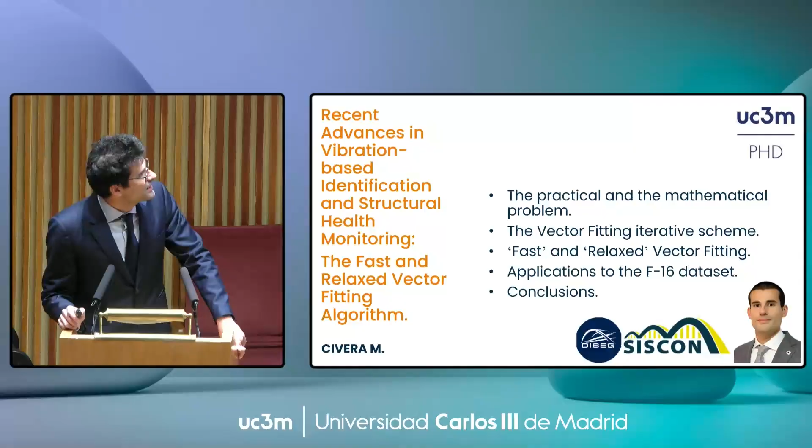So what I will be presenting today is specifically an algorithm for system identification that we basically applied to mechanical vibrations, and especially with Dr. Gabriele De Sena, who invited me here today, I worked a lot on the applications of this algorithm. This is called the fast and relaxed vector fitting, and I will go a bit into its details. But before that, since this is quite a niche topic on dynamics of structures, I just wanted to very briefly give you a rough idea of what's the problem at hand.

So if we are talking about structural dynamics, especially for aeronautics applications, you can have a lot of reasons ranging from control to flight mechanics and everything. But for us, the main point is vibration-based structural health monitoring. So basically, if we have damage, how can we detect it? The idea is that we have a localized reduction in stiffness, and this reduction propagates to the vibrational behavior of our structure. This can be interpreted from the natural frequencies, the mode shapes, or other derived quantities. So this is structural health monitoring in its dynamical framework.

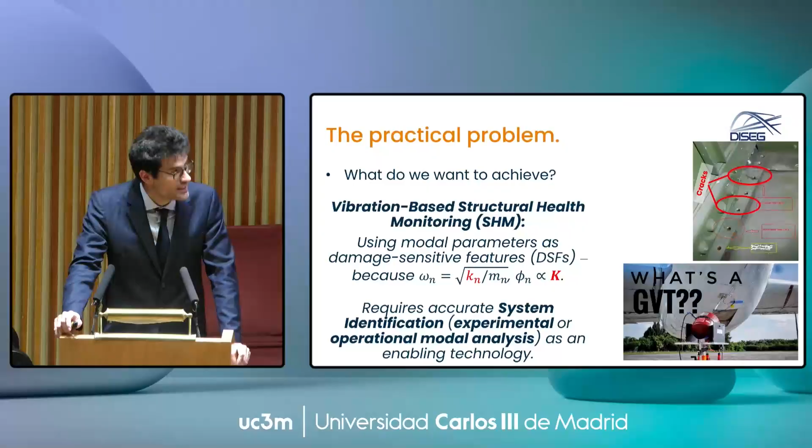What we will do instead here is talk about system identification, which is the step before that: given a time series of accelerations, how can we extract the modal parameters? A typical example in aeronautical applications is ground vibration testing, or GVT. Mathematically we do this with curve fitting, which is very simple. You have your recorded time series, you convert them to the frequency domain with the Fourier transform, and then you fit your analytical formulation to those experimental data points, such that you have an analytical formulation as a function of omega, zeta, and phi, the modal parameters,

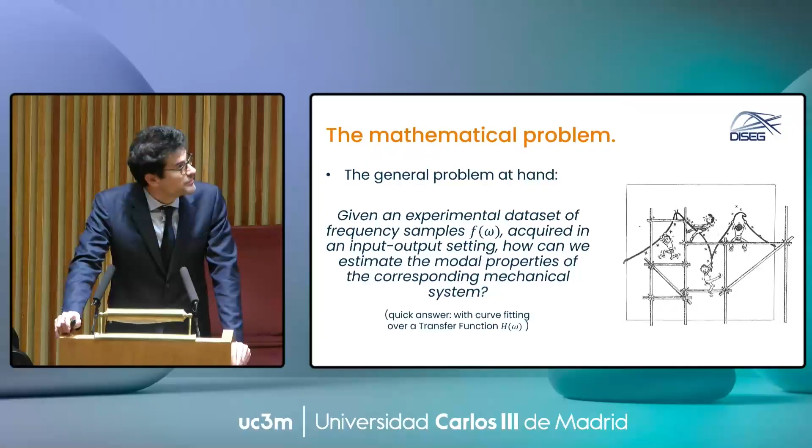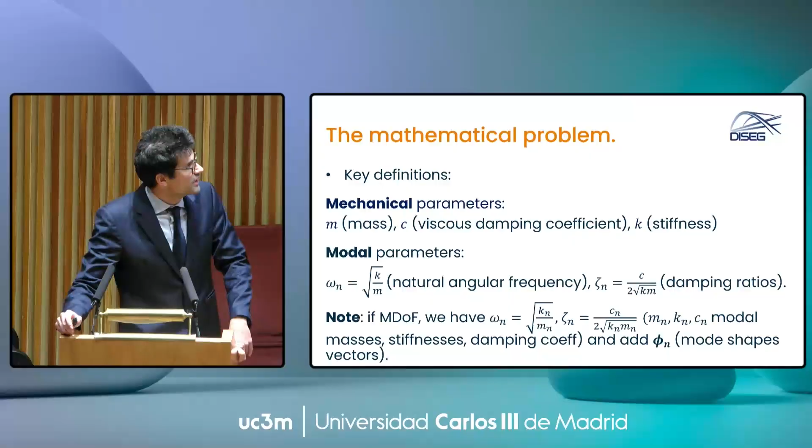that can be estimated. Since there are many different backgrounds here, just to recall, when we talk about modal parameters, we talk about natural frequencies in radians per second, damping ratios, and, for multiple degrees of freedom, multiple natural frequencies, multiple damping ratios, and the mode shapes, the vibrational modes of the structure. For our intent, these are all damage-related quantities. If there is damage, there is a change of stiffness, and if there is a change of stiffness,

these parameters should change. Generally in our field, you don't directly estimate omega, zeta, or phi, but you obtain quantities called the poles of the system. I'm sorry if this is very basic stuff. From the poles and the residues of the system, for a single degree of freedom or a multi-degree of freedom system, you can obtain the other modal quantities.

So how do we define the problem? There are many different algorithms to do dynamic identification or system identification; these are synonyms. Also because in the end these are transfer functions. This is a single degree of freedom example. You can define a transfer function in a number of ways, and most of them are mathematically equivalent, so there is no point in using one or the other formulation. The key point is the mathematical convenience of using one or the other formulation to do this curve fitting we were talking about.

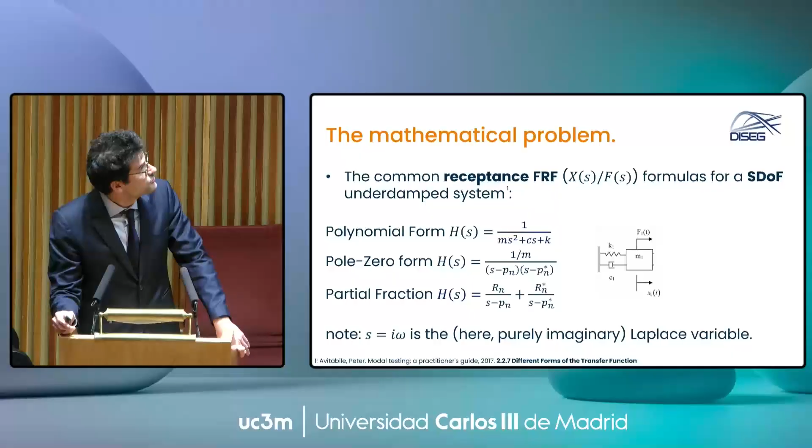So just to give you an idea, these are for receptance FRF. FRF means frequency response functions, so it's the kind of transfer function we use. Receptance means forces in Newton input and displacement in output, but we can do the same also for mobility, which is with velocities, or accelerance, which is with accelerations. And this is for a single degree of freedom. This is what we have when we extend the topic to multiple degrees of freedom.

So, as you can see here, what I wanted to stress is that this is by far the most known and most used formulation. This is called the rational fraction polynomial, or RFP. And you see that basically the idea is to have a certain polynomial with a certain degree m at the numerator and another polynomial with another order n at the denominator. Now, generally for stability reasons, m is much lower than n.

This is what you will find in many algorithms, but the key point is that even if it is the most popular formulation, the most used for many decades, this has some technical issues, okay? So the theoretical foundation is solid. The point is that to find the modal properties, you have a minimization problem. So you have to fit this formulation on your frequency samples. But minimizing the RFP formulation means that you have unknowns at the numerator and unknowns at the denominator. And because of these latter ones, the problem is nonlinear in its unknowns, and so it becomes non-convex when we try to minimize it.

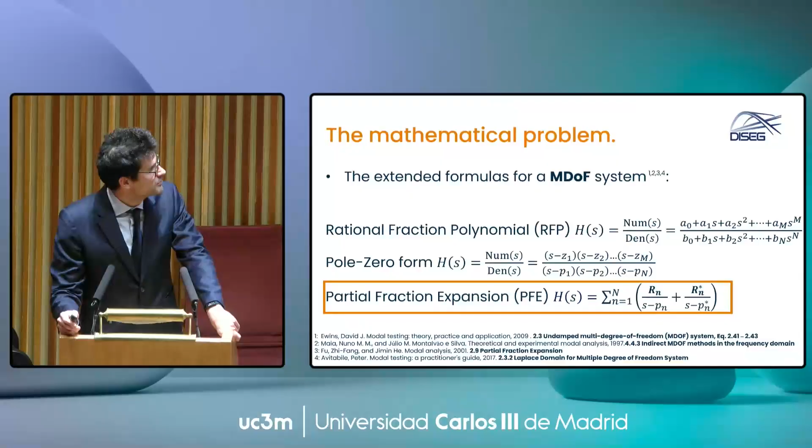So instead, what we do using this methodology is to switch from the RFP formulation to the PFE. PFE stands for partial fraction expansion. You see it here in its multi-degree of freedom formulation. So here we have capital N modes, expressed directly in terms of residues and poles of the system. So what's the key point we can consider?

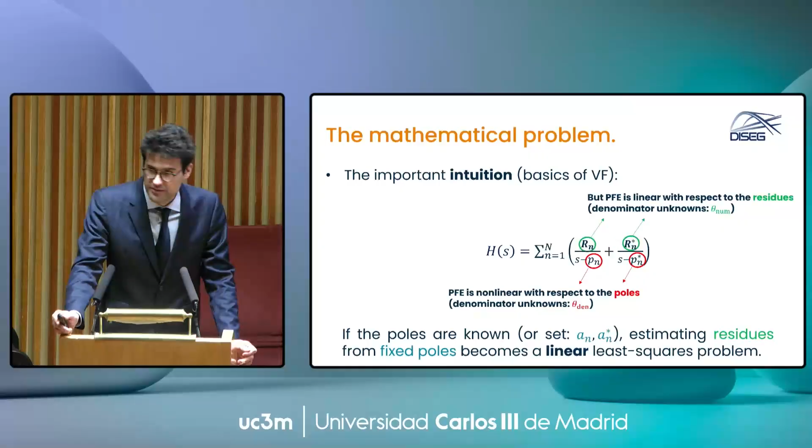Again, here the problem is nonlinear in the sense that we don't know the poles and we don't know the residues. So again, we have unknowns both at the denominator and the numerator. But we will see that basically the vector fitting iterative scheme works by assuming a set of poles, and then for this assumed set of poles, it derives the residues. In this way we don't have any unknowns remaining below. Now we will see how it happens in detail.

One key point that I wanted to stress is that we did not invent the vector fitting, okay? The vector fitting was already existing for quite a while, but in a different field. It was invented in electrical engineering, intended for the identification of electrical circuits, where we have not acceleration time series but voltage time series. So it was not intended for mechanical vibrations or structural uses, but in the end we can do it because the core idea is that we have mechanical-electrical analogies.

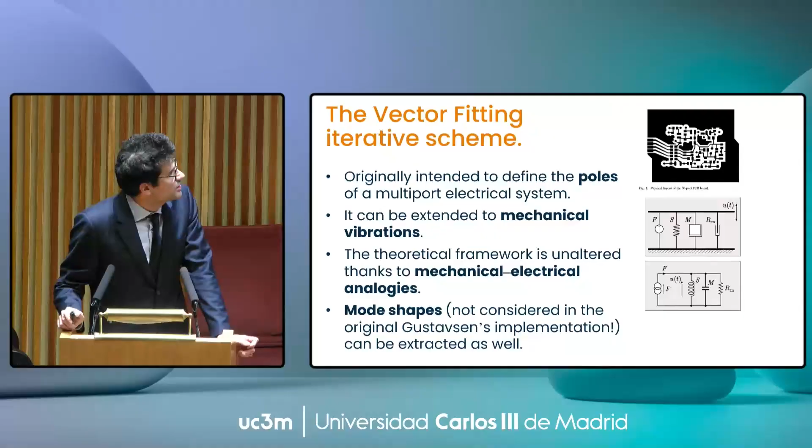Mechanical-electrical analogies means that you can always define a time-varying mechanical system as an equivalent electrical circuit and vice versa. So basically, you can straightforwardly translate any algorithm between the two, because mechanical stiffness can be written in terms of electrical capacitors and resistors. So the implementation is pretty straightforward. The only thing that we need to add is mode shapes, because generally in electrical circuitry they don't care. They have what can be seen as a mode shape, but they don't care.

Now, since the next part is about the iterative scheme of the vector fitting, so how it actually works, I need to introduce some terms just to make what comes next a little more digestible. So let's say that our transfer function is capital H(s). Let's consider this the final form, what we want to achieve at the end: our analytical equivalent of our experimental data.

To do so, we will use a counterpart that is lowercase h, which is basically another rational function that will be iterated many steps, every time using trial poles. So every time we will assume some poles, and we will update them.

The idea is that iteration after iteration we can converge to the actual poles of the system. And then lowercase f is just the experimental value, so the data, the frequency samples we want to fit our analytical function over. And sigma is an auxiliary rational function that we will see in a moment why it comes in useful.

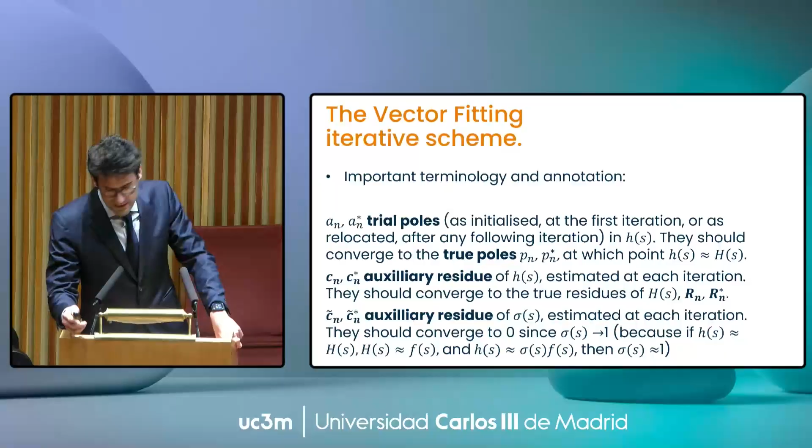And the other point that I need to explain, just to make some things a little more clear, is that we need to consider P and R as the actual true poles and true residues of our system, while, as said, in the next formulation you will see A and C as the trial poles and, in a way, the trial residues, so the ones that change and are updated at any iteration. And we will also see why the residues appear both with and without the tilde above.

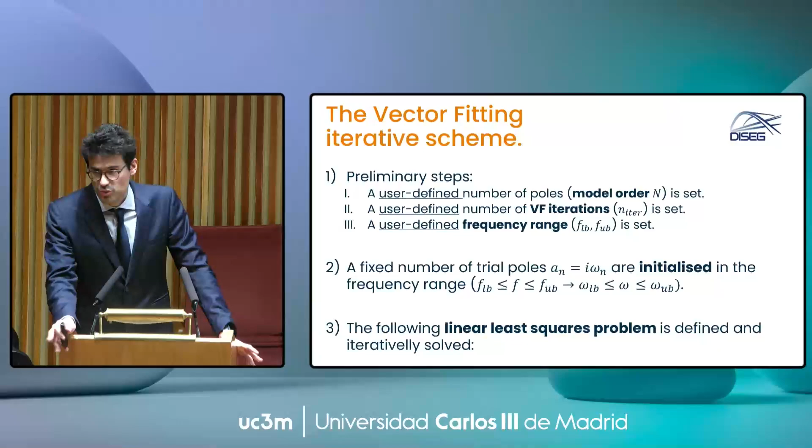So at the beginning, I said vector fitting is an iterative code. So basically, the user needs to define how many modes you want to identify, so what we call the model order. How many iterations, because now we are also developing a variant that can automatically set the number of iterations, but so far we still set them manually. And of course, the frequency range, so the lower and higher frequency of interest. This depends on your problem at hand.

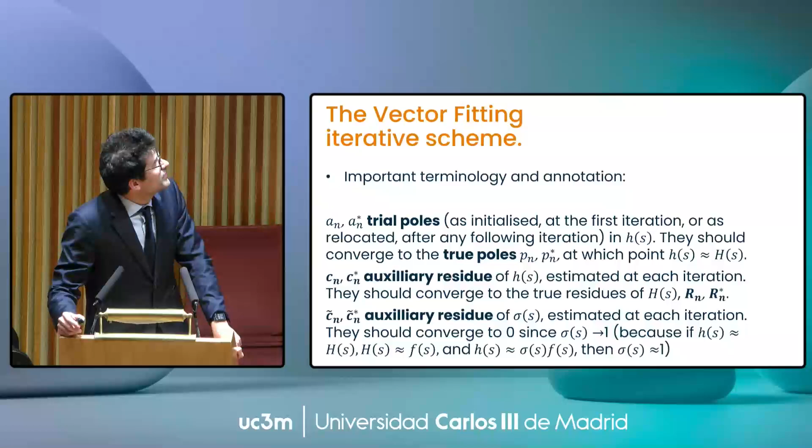So at the beginning, the algorithm initializes the poles in a totally random manner inside your frequency range. So you start with a set of poles that are totally random, and then these are iteratively updated, solving the following problem. So now I will try to explain in a few slides, but if I can come back, remember that what we want to achieve is this formulation here.

So you see true residues over true poles, capital H. Here, instead, we start with lowercase h, and we have, as said, trial poles below and trial residues above. What we say is that this function is equal to our frequency samples, so f, our experimental evidence, times the scaling sigma function. And we define the scaling sigma function as you see there, with the same poles as the trial poles in h, but different residues. So C and C tilde are different quantities.

The reason why we do so we will see in a minute, but this is the point of vector fitting, because the idea of vector fitting, as already hinted before, is not to solve for the poles, but to solve for the residues of lowercase h, so to find this C. The reason why we define the scaling function sigma as we did is because we can then write the least squares problem you see here. So we say that lowercase h is equal to sigma times f, and so we have the first equation, but we also defined sigma to be in the form reported in the second equation.

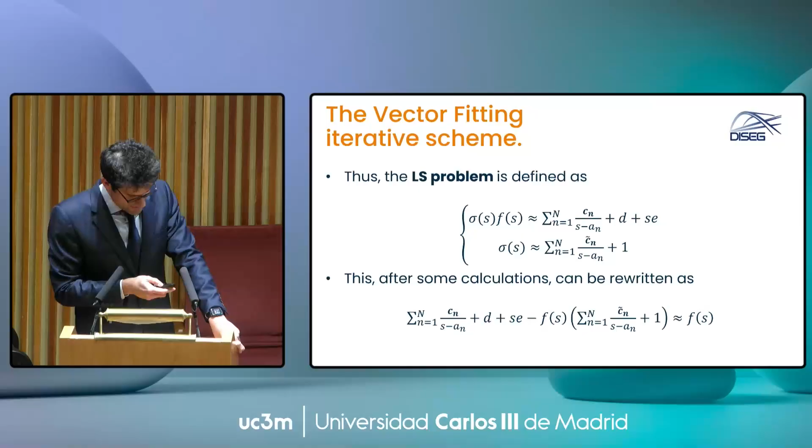So it means that if we take these two equations and we replace sigma from the second inside the first one, after some rewriting, we end up with the formulation you see in the bottom row. And why is it important? It is important because this is a least squares problem of a very general kind. And we can solve it if we have a very large number of frequency samples, here called capital NS. The problem is overdetermined, and we can solve it.

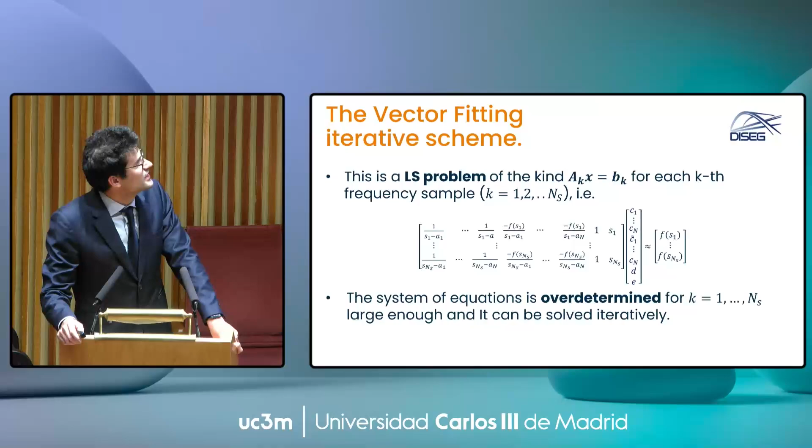But what is important here is that in this problem, different from RFP, you can see that all the unknowns are in that column vector, so they are only at the numerator, not at the denominator. So it is linear in its unknowns. And also, it's not ill-conditioned, because the Laplace variable S is always at the same order, to the power of -1, so it doesn't change order. So the problem is linear in its unknowns and not ill-conditioned. This is the strength of this methodology with respect to the most common ones.

And as said, we are not estimating the poles. So we start with some assumed poles. Let's say that for step j equal to 1, we start with a set of poles. From that, solving all of these, we obtain all the residues, so C1 to C capital N, and C tilde 1 to C tilde capital N. There is a tilde missing there, sorry.

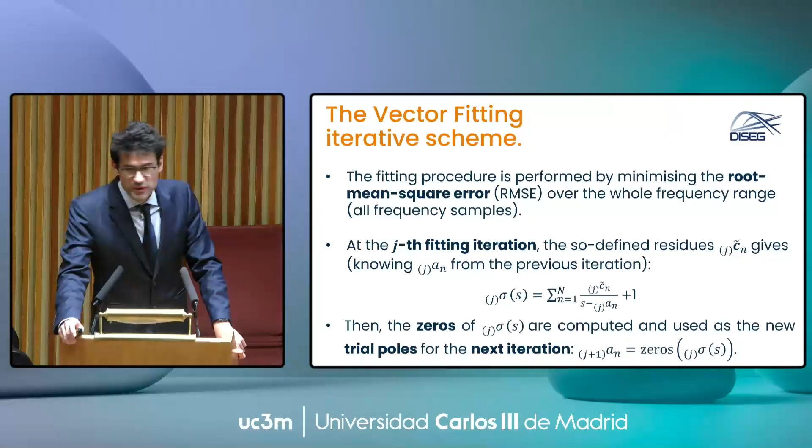And once we got these residues, so for given residues and given poles, we can estimate the next iteration poles as the zeros of this function. So this is the idea. At every step, we estimate the residues, which is linear, and then we compute the next set of poles, okay? So this is the idea.

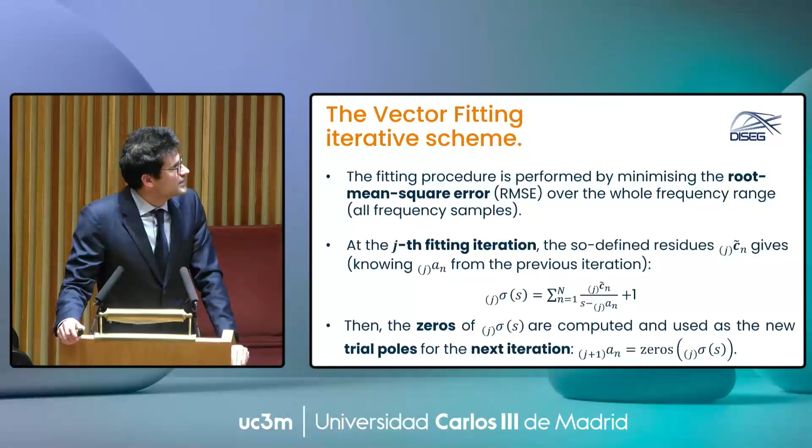And basically, after a certain number of iterations, which is generally pretty low in all the applications we have ever tried, we never needed more than 5 iterations at most, the iterated poles should converge to the actual poles of the system, and also the residues as well. And now it's not reported, but the residues C tilde, so the residues of the scaling function, should instead converge to 0, because sigma will converge to 1.

And then, in the end, we are back to the basics of system identification. If you have the poles and the residues, you can estimate damping ratios, natural frequencies, and also the mode shapes for all modes of interest. So now I don't want to bother you with other details, because what we actually used was not the basic formulation, but relatively newer variants, which are called the fast and the relaxed.

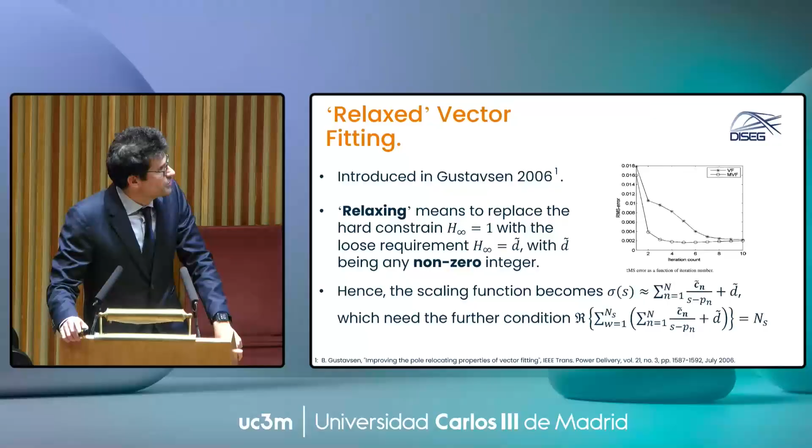Relaxed is just the point of replacing plus 1 in the scaling function with plus d, and not forcing d to be 1, because the idea is that after a few iterations it should converge to 1, but at the first iterations, leaving it free to take any number is just a way to speed up things and remove useless constraints.

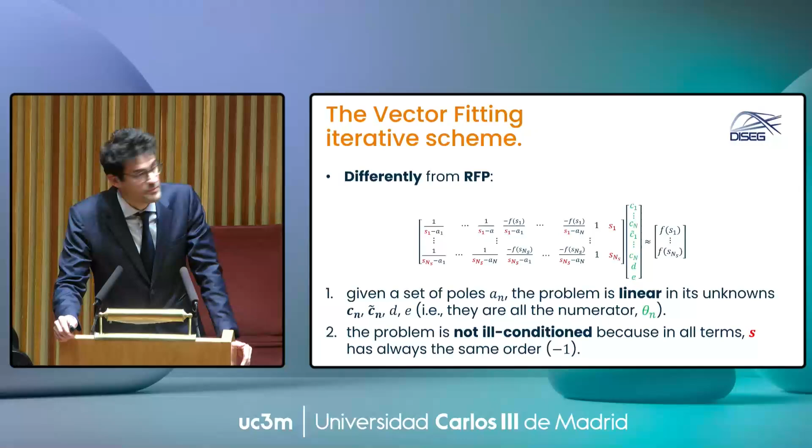And also the fast variant basically doesn't solve explicitly this least square problem here, but since this matrix is extremely big but also extremely sparse, it does the QR decomposition of it. QR decomposition, as probably most of you know, is a mathematical tool to get rid of useless entries in big but sparse matrices. But these are only technical details that do not change the core idea of the iterative schemes. They are just technical improvements.

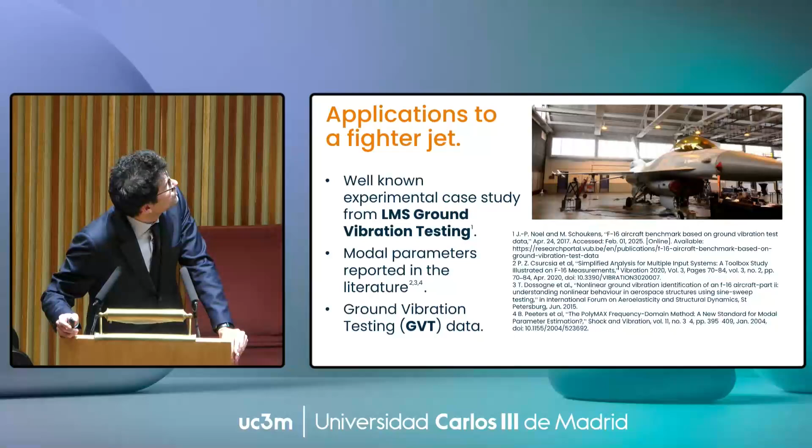So, as mentioned, I did my PhD in aerospace. Now I am working in the Department of Civil Engineering, so we do system identification on pretty much everything. With Gabriele, we applied this method ranging from buildings to bridges to helicopter main rotor blades and stuff. Here, just to give you something of actual interest for you, this is an application to F16 ground vibration testing data.

These are actual available data sets, so you can download them from the internet. But the authors, the Siemens group from Belgium, only made public 2 output channels out of the dozens that they used. We asked them if they can provide the other readings, but it's a military jet, so we're still waiting for a hopefully positive reply. So here there is one actuator, a single input, and 2 channels, which counts as multiple outputs. So this is a classic single input, multi-output application.

As you see here, what we did was try it on different kinds of inputs, because the authors of this dataset also tried different inputs. Theoretically, results should be identical, but in practice they aren't. These are the results for the swept sine. The swept sine was pretty accurate.

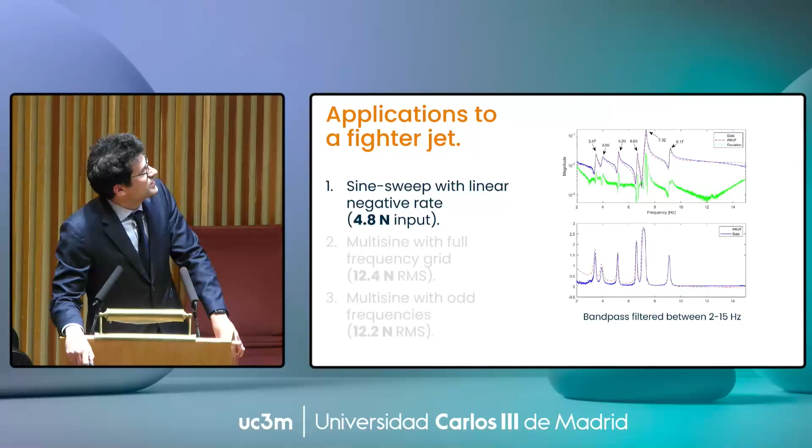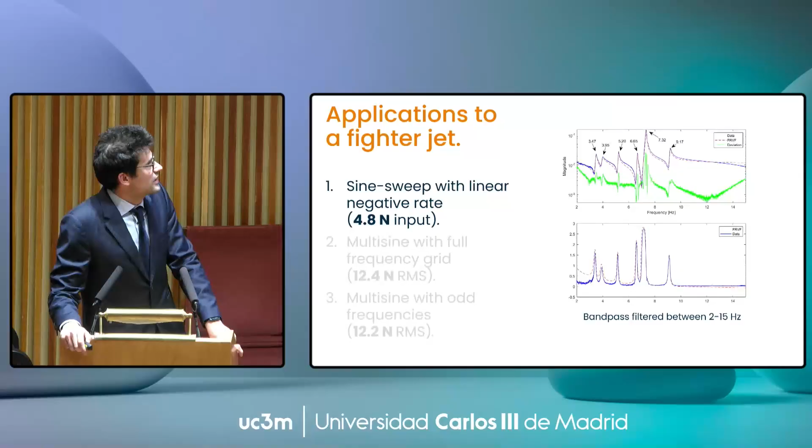In blue is the data, the given experimental input-output FRF. In red is the fitted analytical model using this vector fitting iterative scheme. You see that the results are very consistent. The deviation in green is relatively good, I would consider. Then also using multi-sine excitation, results are again pretty good. So estimations seem reliable, looking at how it fitted both the amplitude above and the phase of the FRF below.

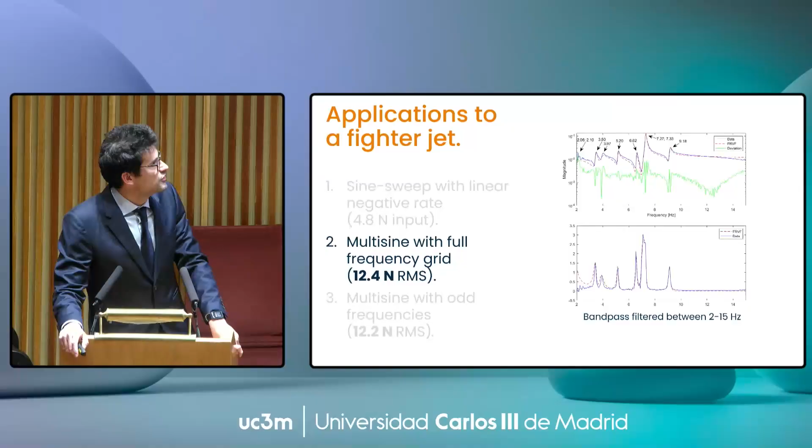And this was expected but always interesting: this is the multi-sine with odd frequencies. Even if the amplitude is comparable to the previous one, more or less 12 Newton root mean square, since the frequency grid was smaller, only odd frequencies, the actual amplitude was concentrated in lower frequencies. So overall, the system was more excited, and at this level of amplitude, with this excitation, the structure behaves very non-linearly.

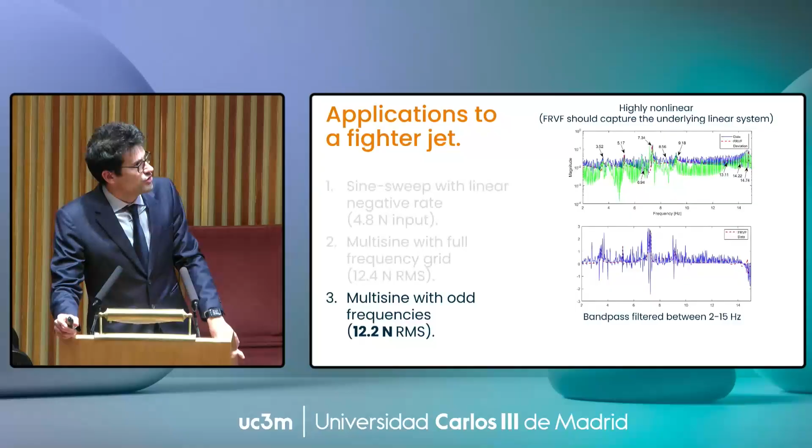Aeronautical structures, whenever the amplitude reaches a certain value, start to behave with all kinds of non-linearities, mainly due to friction in these cases. Since Fourier is linear, whenever you apply a linear operator to a non-linear system, everything becomes messy, and these noise-like non-linearity distortions give you very messy data. Nevertheless, the vector fitting scheme can give you quite reliable estimation of the underlying linear system. You can see that the peaks are almost where they should be.

And in reality, that's it, because with these few data applied here, we just benchmarked our results against the values reported in the literature, applied both by the original authors with their own algorithm, which is PolyMAX, a commercial product, and also from other authors that used a more conventional method like the BLA, which is just a best linear approximation.

The interesting part about these results is that, since the structure was on its wheels, it also had some rigid body motions, not exactly at 0 Hertz, but at a lower frequency below 5 Hertz. So these are rigid translations and rigid rotations. They are not flexible modes of the structural component itself. But generally, the results are very in line with the expected targets and, as said, achieved in a computationally

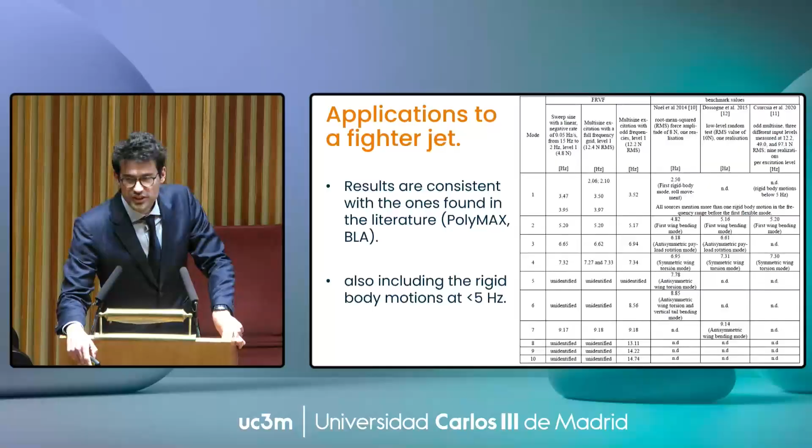efficient way. And I wanted to stress what's interesting about vibration-based system identification, and I say structural monitoring is the next step. If you have recordings with and without damage, you can compare them and look for anomalies. But what's interesting is the multidisciplinarity. In this case, we applied an algorithm that existed for other purposes in electrical engineering to mechanical vibrations. And even within mechanical vibration, you can apply it to buildings, you can apply it to aerospace.

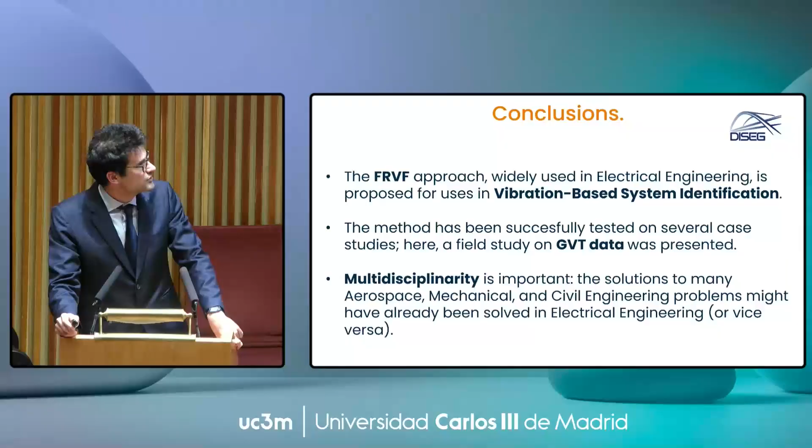With Gabriele now, we are applying it to the International Space Station recordings, which is very difficult to deal with. But you can and you should apply it in many different domains. As long as it vibrates, it can be done. So that's it. We published quite a lot on this and related things.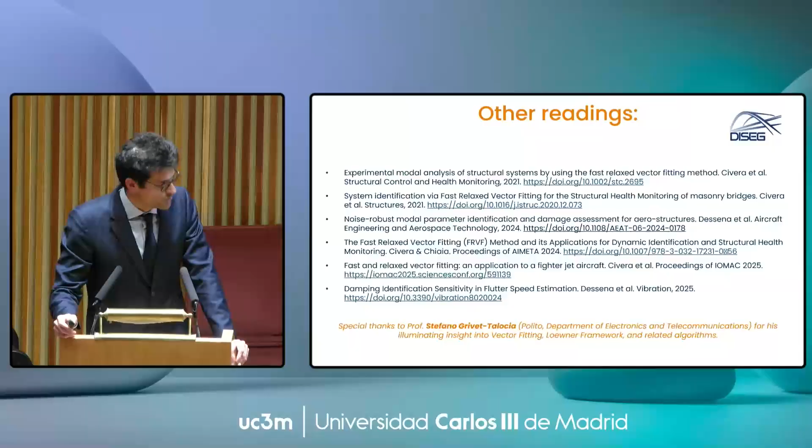I would like to thank Professor Stefano Grivet-Talocia, a professor of electrical engineering, who first told me when I was still a PhD student, why don't you apply this algorithm in your field, since I applied it in mine and it works well. So I should really thank him for introducing me to this idea.

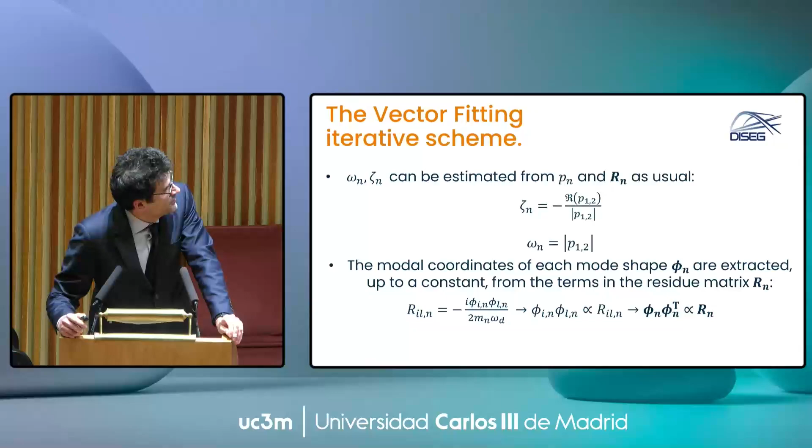Okay. So yes, of course. To keep things short, I said that the initialization of the poles is totally random. Honestly, it's not totally random. As of now, they are just supposed to be as distanced as possible in the range. Consider that these are complex values, so they exist in the real part and imaginary part, and they are set to fill the full frequency range.

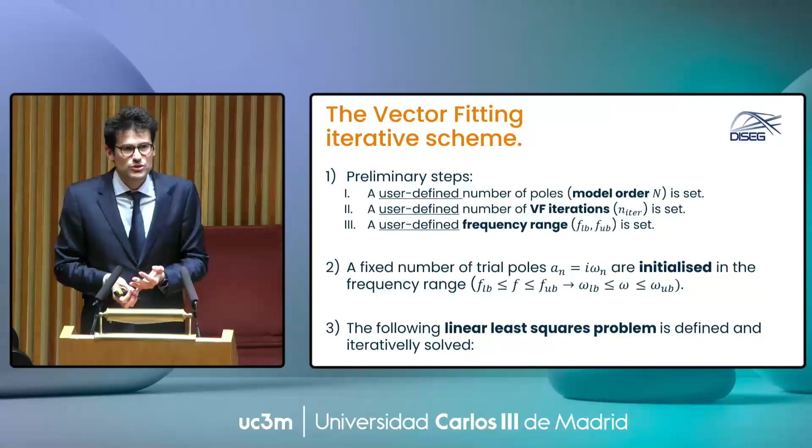So they fill the full domain, just to have no pole too far from the end result, because if your initial poles are badly initialized, they may not converge. This happens, of course. So the idea is that if I don't know anything about my system, let's cover all the frequency range of interest. Since this algorithm is to be applied everywhere, the idea is just full coverage.

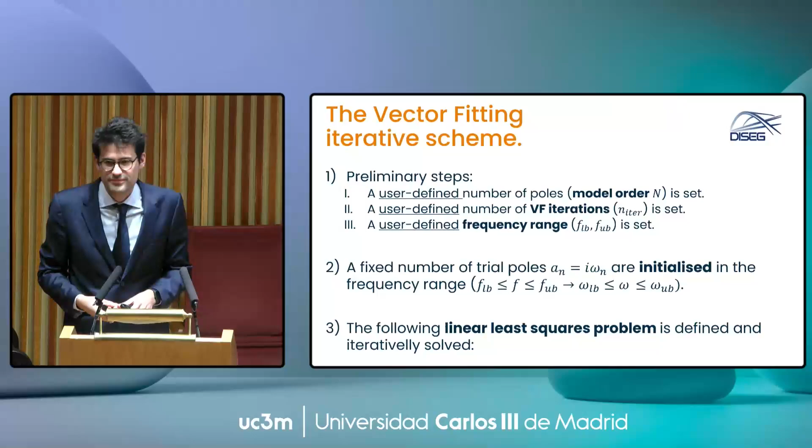But of course, that could be a very interesting research approach, so I will take note of that. You can, in a physically principled way, initialize them close to where you expect them to be. That should speed up iterations. Okay, thanks. So maybe it would be a bit faster if you do it. Yeah. And the second question about the system: like you said, this approach is multidisciplinary and you could apply it to other problems.

So I was thinking of a mechanical system in which you may have time-varying matrices. Like a time-varying mass in a system where your mass is changing over time, maybe a rocket problem in which you're losing mass. Do you think this approach could be useful in studying systems like that?

Yes, of course. You have a lot of great ideas, by the way. I'm gonna steal all of them. Right, okay. Thank you. You will be in the acknowledgement. So no,

but of course. Whatever can be decomposed into modes can be done. Of course here there's the assumption of stationarity of the system. At least in our field, we always work in the assumption of linearity and stationarity of the problem. If you want it to be non-stationary, I never thought about it, but I think instead of the Fourier transform, you can do a short-time Fourier transform or whatever.

So you can apply it instant by instant and track natural frequency variations time-wise. It's totally feasible theoretically speaking. Never thought of it. Okay, great. Thanks, Marco. That was all mine.